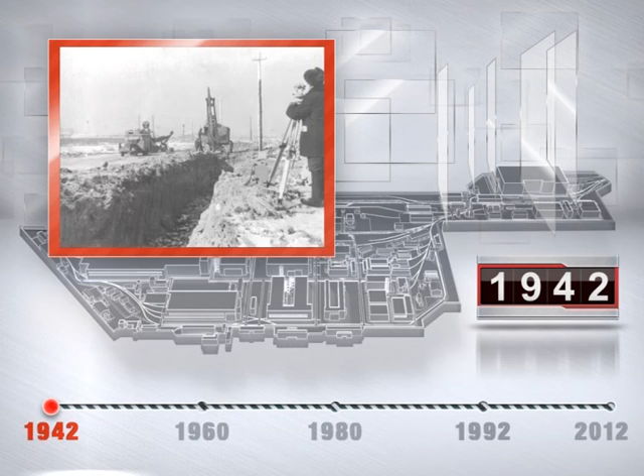Yuzhno-Uralsky Engineering Works was established in the early 40s of the last century in Orsk. In not simple wartime, manufacturing facilities were evacuated to town. One of such works marked the beginning of the plant. Over 70 years, ORMETO-YUMZ, included into mining and smelting holding company UMMC, is high-technology enterprise and ranks among leaders of Russian heavy engineering.

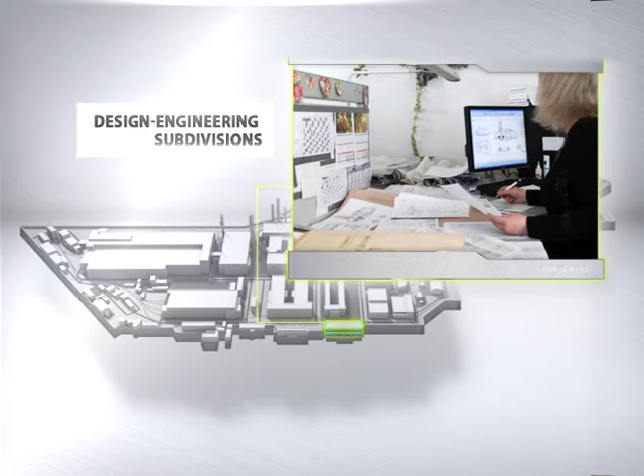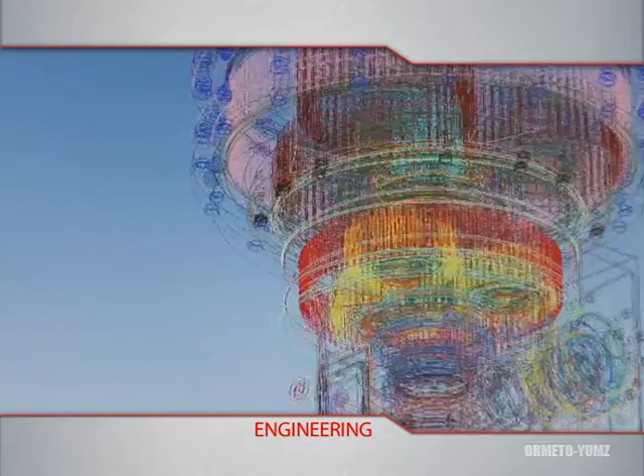Engineering and production potential of the enterprise makes possible to design, manufacture, deliver, and carry out contract supervision of equipment for enterprises of ferrous, non-ferrous, mining, and power engineering industries. 250 persons occupied in 6 design engineering departments design ORMETO-YUMZ hardware. Design engineering service specialists develop sintering machines, continuous casting machines, hoisting and handling equipment, crushers, mills, equipment for loose materials store yards.

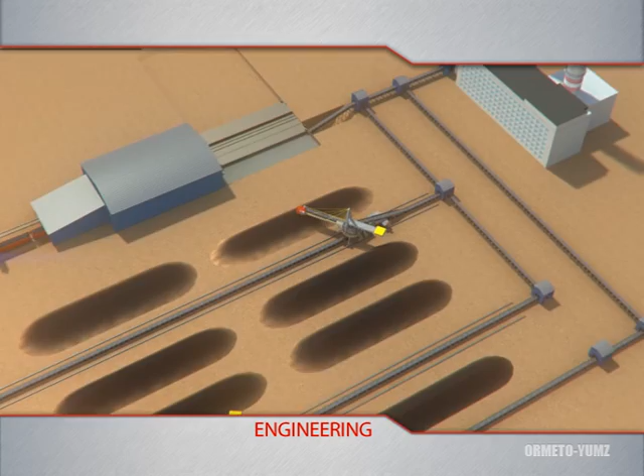ORMETO-YUMZ is a unique enterprise in Russia, which develops transfer equipment, car dumpers, stackers, reclaimers, and the one developer in the territory of post-Soviet area of blending equipment, which makes possible to obtain high constancy of raw material quality and properties.

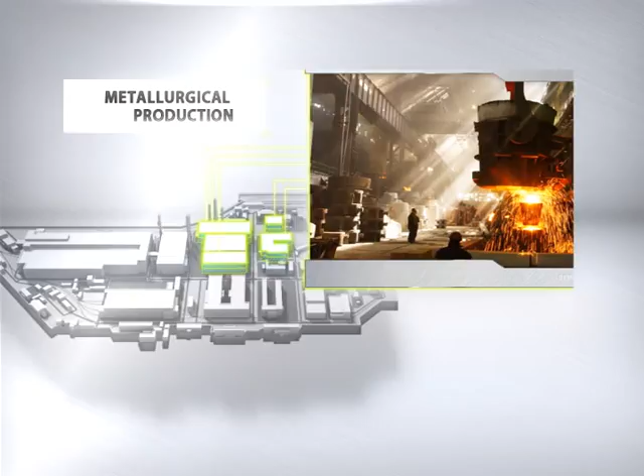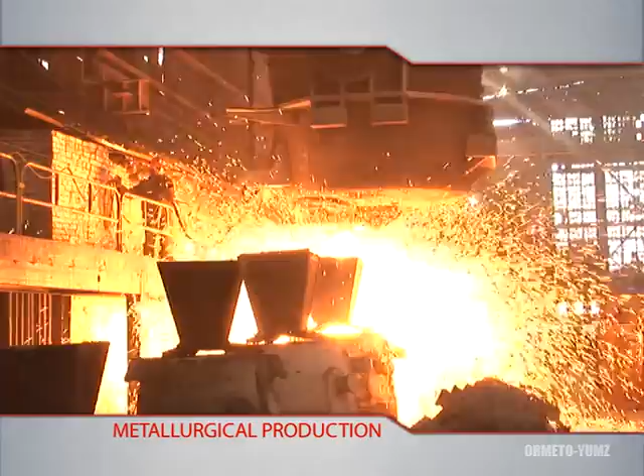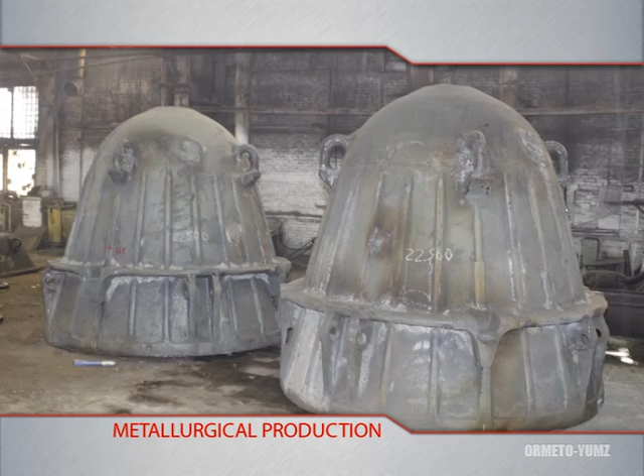The works possesses all necessary equipment for cyclical turnaround from metal smelting till the end product manufacturing. 50 and 12 tons capacity electric furnaces to melt carbon, alloy and heat-resistant steels, and ladle furnace of 70 tons capacity to secondary refining and vacuum chamber for metal degasification are installed in steel shop. Large capacity products from steel and iron up to 45 tons are manufactured in molded foundry at machine and hand molding bays. Installations of liquid self-hardening and cold hardening sands preparation.

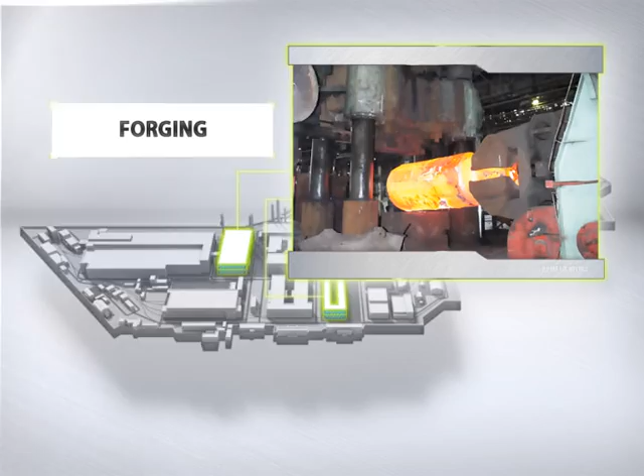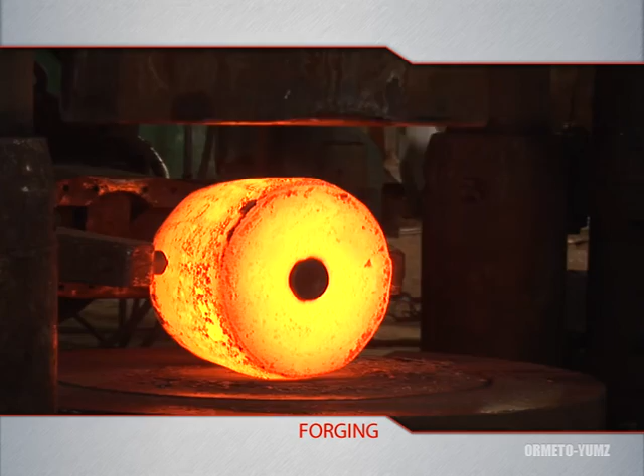Electric steel and iron foundry includes 2 electric furnaces, 3-ton and 1.5-ton capacity. Blast cupola, receiver tank capacity 5 tons, and non-ferrous casting area with electric furnace of 0.5 tons capacity to produce low-tonnage cast products from iron, steel, and non-ferrous metals. Forging manufacturing with weight up to 45 tons is carried out in forge and press shop on steam hydraulic presses with 800 tons and 3,000 tons force, and on hydraulic press with 6,000 tons force.

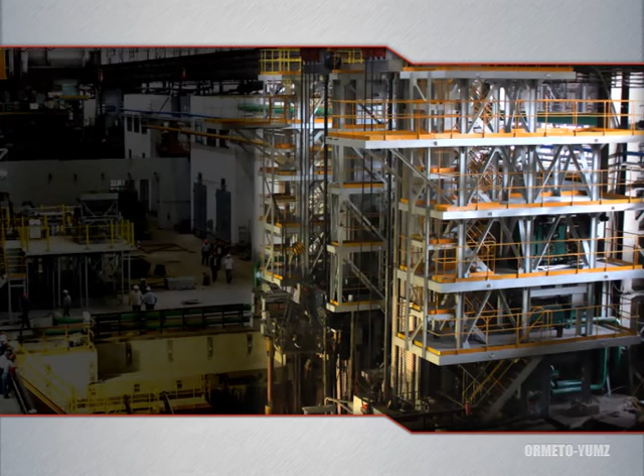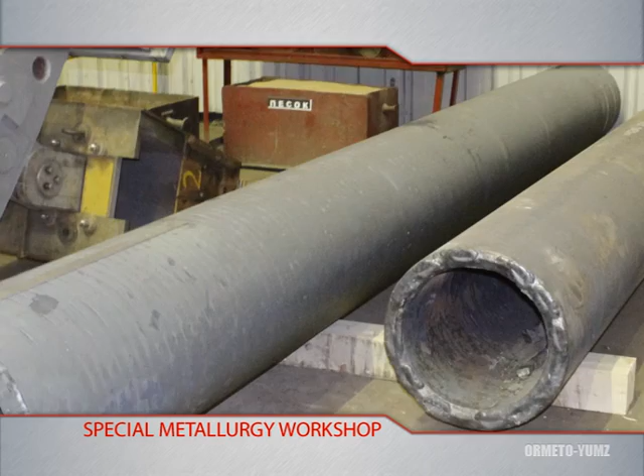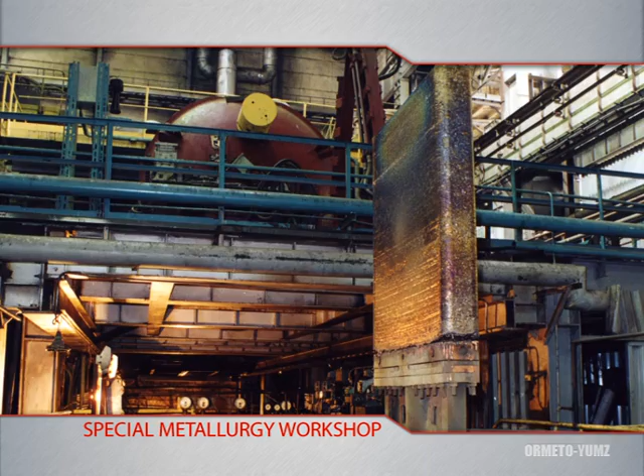Special metallurgy shop includes multi-purpose module complex of electroslag remelting and electron beam remelting. Electroslag remelting furnace built under assistance of Ministry of Industry and Trade of Russian Federation makes possible to produce high-quality solid and hollow ingots with diameter from 550 up to 1450 millimeters. The furnace is based on the high vacuum melting of metal or special property alloy using the energy of an electron beam. The furnace provides manufacturing of steel, titanium, copper slabs, and ingots of round and rectangular cross-section. Maximum weight of smelt ingots is up to 30 tons.

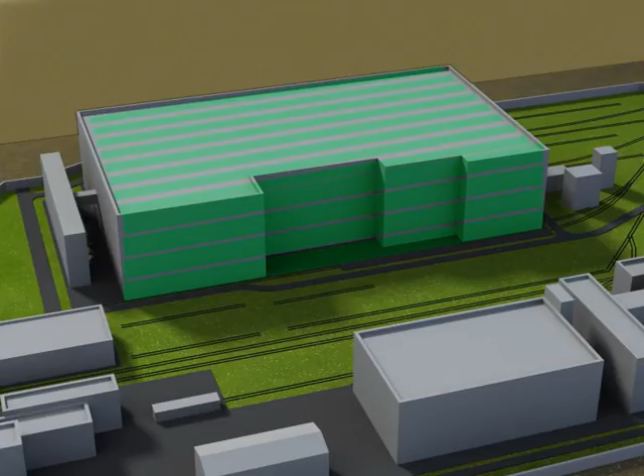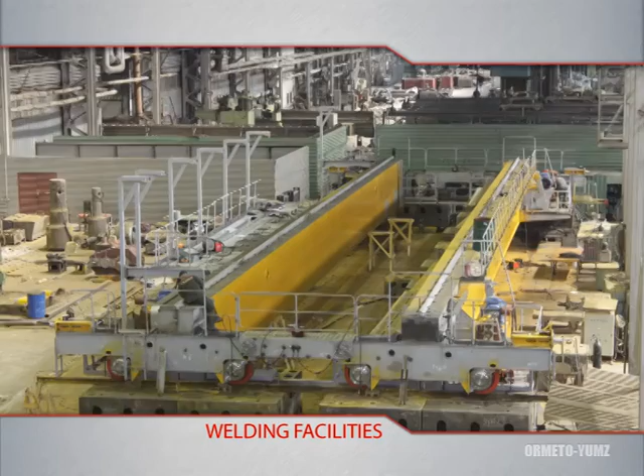ORMETO-YUMZ welding fabrication includes blank production shop, machining shop, and assembly and welding shop. The enterprise has the opportunity to produce heat-treated metalware made from rolled metal and multiple unit metalwares with weight up to 125 tons for metallurgical, hoisting and handling, oil and gas production equipment, building industry. Modern welding methods are used in welding metalware production.

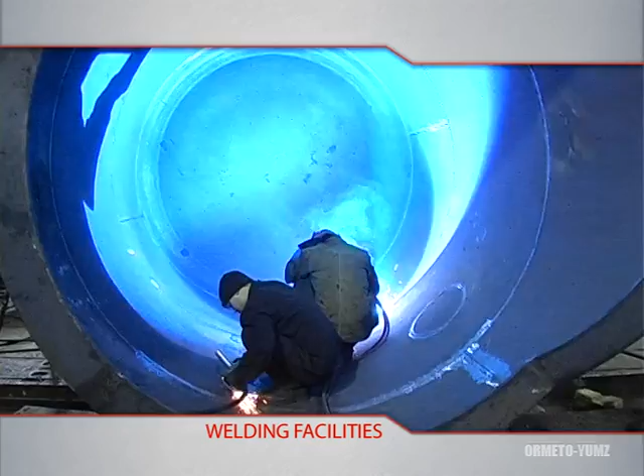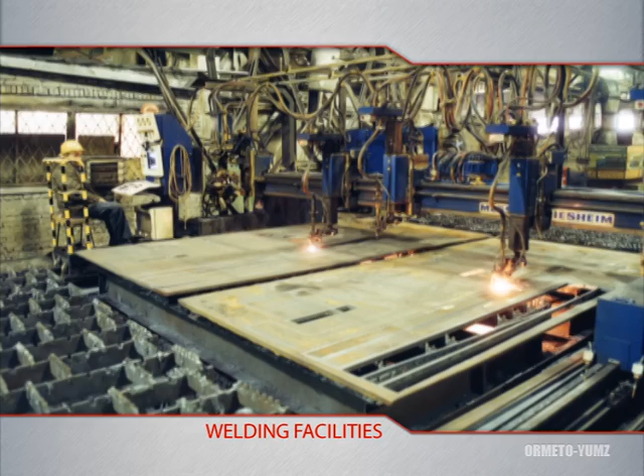Among them, machine welding in carbonic acid medium with wires of solid cross-section and powder materials. Machine welding under melt layer. Electroslag welding with combination of parts with thickness up to 800 millimeters in joint point. Powder materials plasma jet hard facing. Welding procedure specifications of hazardous technical devices are certified within System of National Agency of Non-Destructive Testing and Welding.

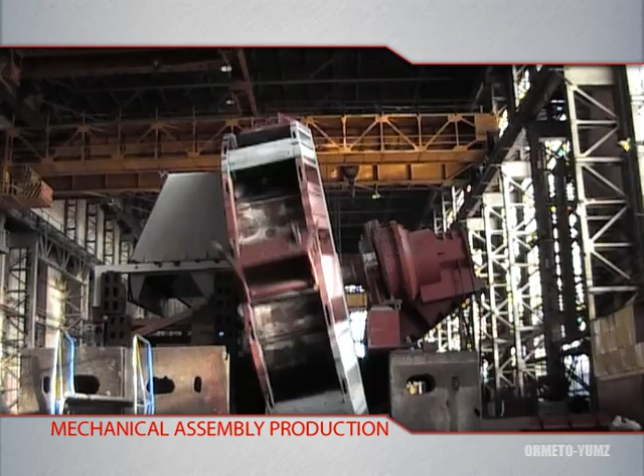At anniversary year, ORMETO-YUMZ buys and installs new hydraulic 4-roll sheet bending machine of Italian manufacture. Technical capabilities of sheet bending machine make possible to roll sheets having thickness up to 85 millimeters and width up to 3 meters. Heart of the enterprise is mechanical assembly production, including 4 shops which carry out machining of machines components made by the enterprise, and 3 assembly shops where produced machines are assembled, adjusted, painted, and packed.

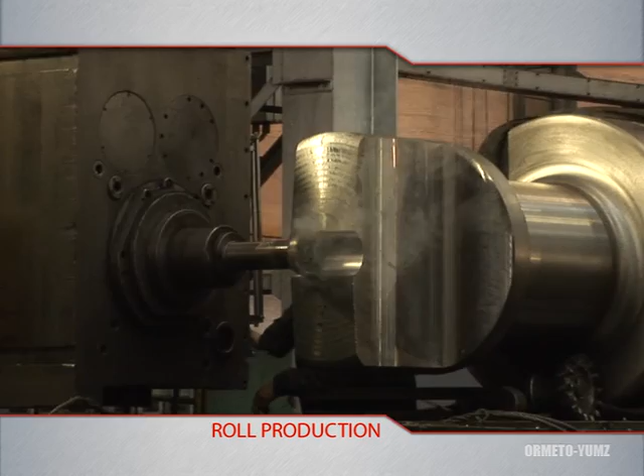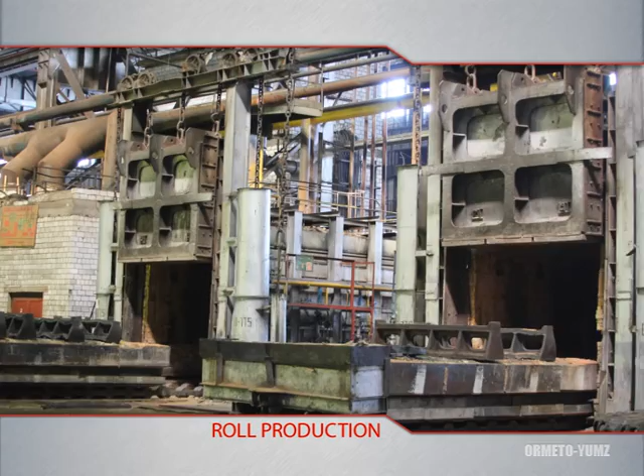The important part of ORMETO-YUMZ marketable products is forming rolls production. Consistent high quality of the rolls is provided by constant advancement of melting technology of roll steel, forging, heat treatment, and machining of the rolls. Adoption of electroslag remelting technology provides considerable quality improvement of made rolls. Heat treatment area of the shop is equipped with vertical furnaces, horizontal bogie-type furnaces, power current high-frequency hardening unit, and other equipment, which makes possible to carry out any kinds of heat treatment of machine parts, hot and cold rolled rolls.

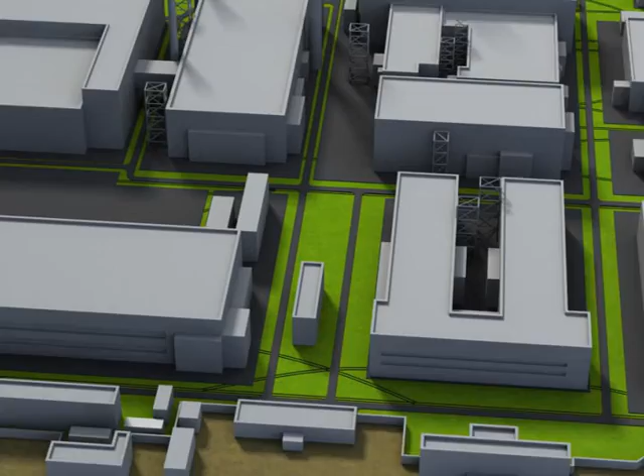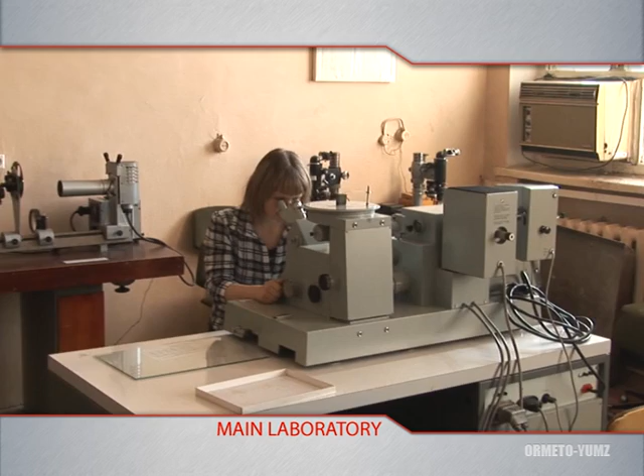All of the products under the trademark of ORMETO-YUMZ undergo strict quality control held at each stage of production. The main plant laboratory checks products' qualitative characteristics compliance. Quality Management System ISO 9001-2008 is valid in the enterprise. Quality service provides full adherence to all standards.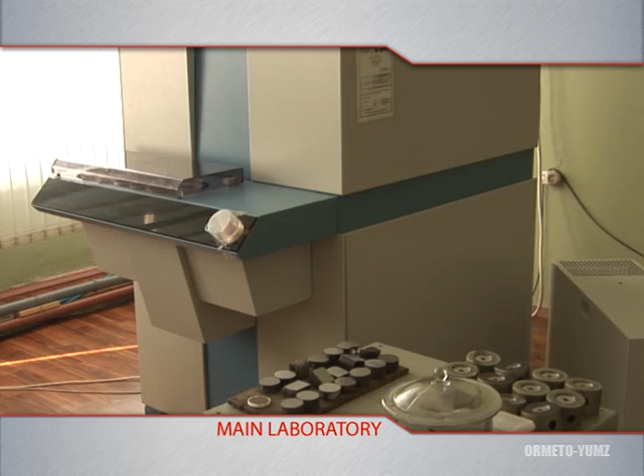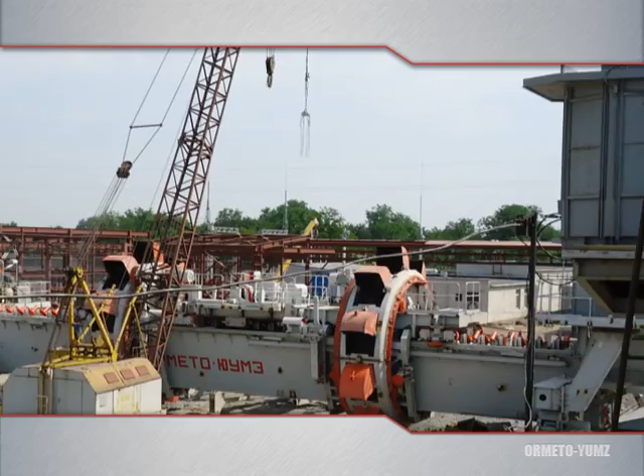Due to this, the product's quality was confirmed with competent certificates and licenses, such as ISO 9001-2008 certificate, Det Norsk Veritas, Lloyd certificate for production of steel forgings, license on production of nuclear facilities and storages for nuclear materials. Service Engineering Center provides contract supervision of equipment's consumer plants and its further technical audit.

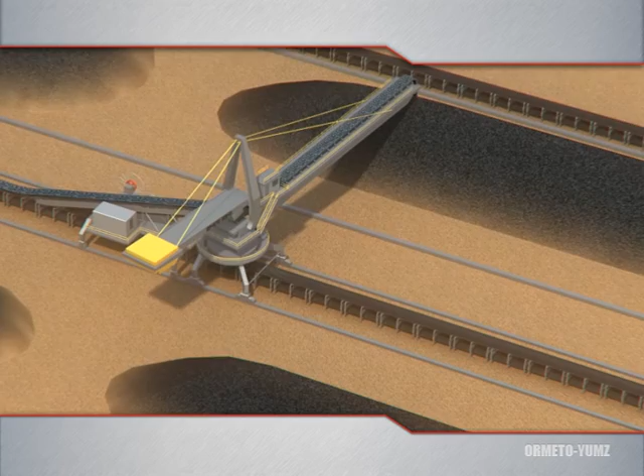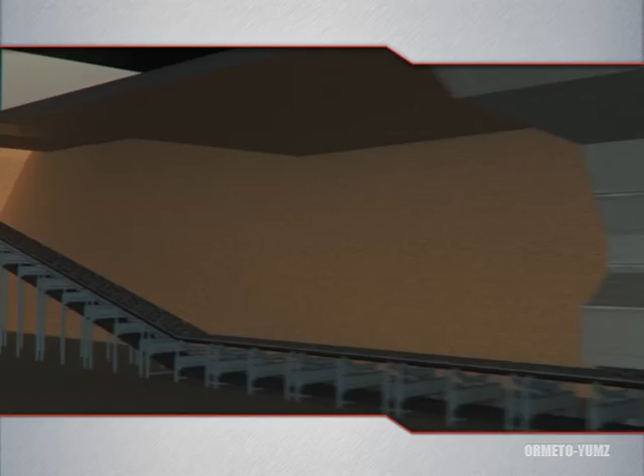ORMETO-YUMZ production includes more than 100 sorts of equipment. Facilities for processing and transportation of piled raw materials, car dumpers, stackers, reclaimers, blending machines, and belt conveyors have a special place among our products. This equipment is used in fuel preparation complexes for power plants and in port transshipment complexes, as well as in discharge blending complexes of raw materials preparation shops in metallurgy.

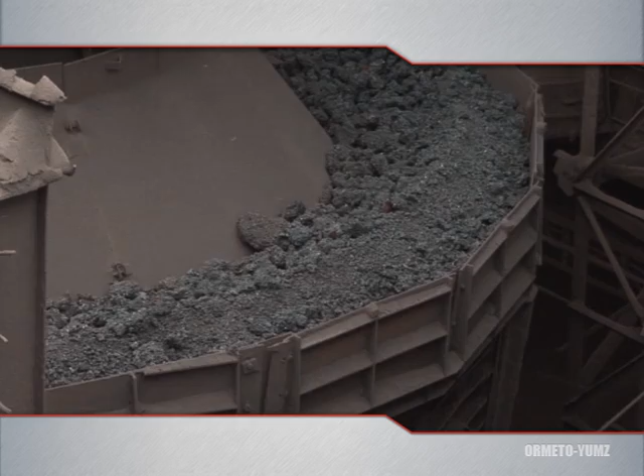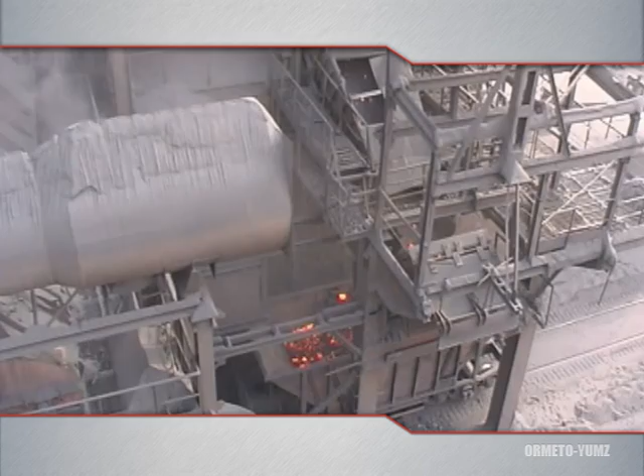Sintering equipment under the trademark of ORMETO-YUMZ, such as sintering machines, coolers, and support equipment, is operated in such large enterprises as Zaporizhstal, Chelyabinsk Metallurgical Plant, Ural Steel, and in different countries: Turkey, Pakistan, Egypt, Bulgaria, Cuba, China, Iran, and India. The biggest sintering machine was installed in Visakhapatnam Steel Plant in India. Its sintering area is 408 square meters.

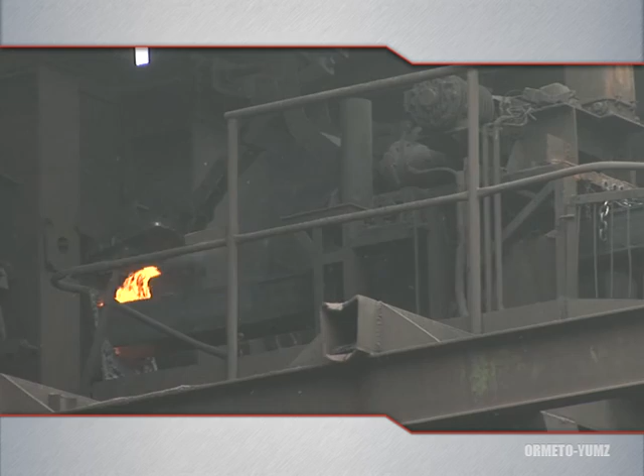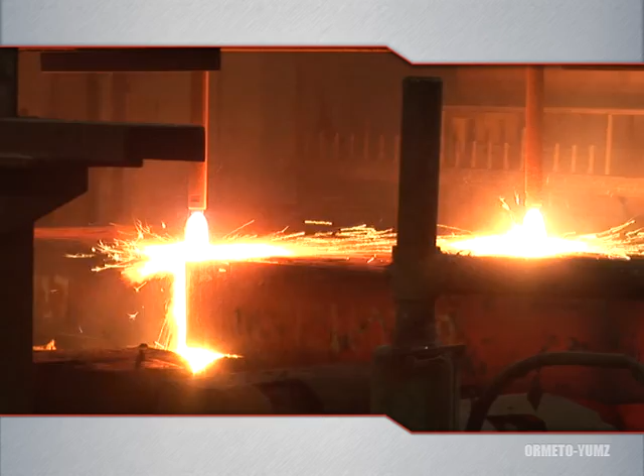Our enterprise manufactures coke pushers, mud guns, slag carriages, ladle cars, skip winches, top charging gears for coke, blast furnace, and steel industries. For ferrous metallurgy, ORMETO-YUMZ manufactures billet and bloom continuous casting machines, turrets, mechanisms and assemblies for rolling mills.

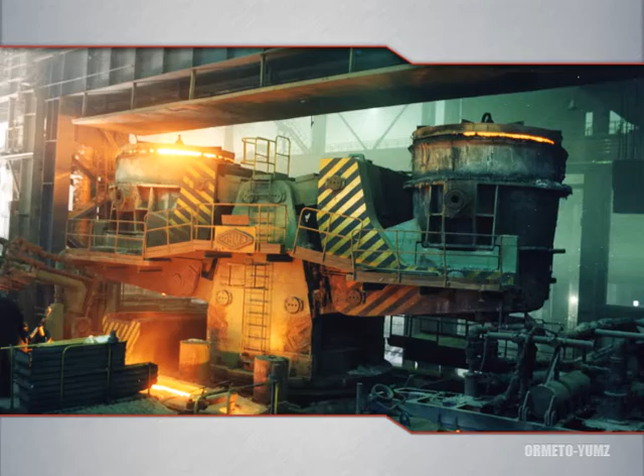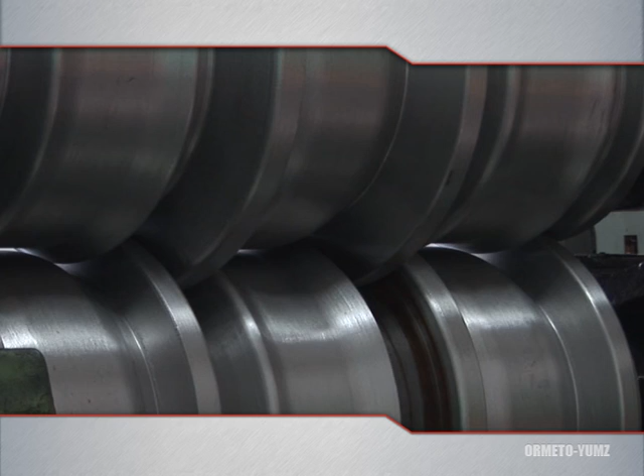ORMETO-YUMZ took part in engineering and reconstruction of continuous casting machines in metallurgical plants such as Ural Steel, Severstal, Belarusian Steelworks, Oskol Electrometallurgical Plant, as well as in India and many others. ORMETO-YUMZ is one of the leading Russian manufacturers of steel and iron mill rolls. During the last 30 years, the enterprise manufactured over 420,000 tons of mill rolls for consumers from the countries of the CIS, Europe, and Asia.

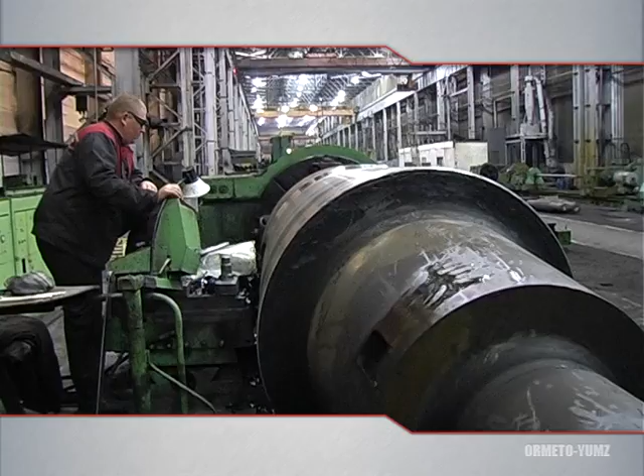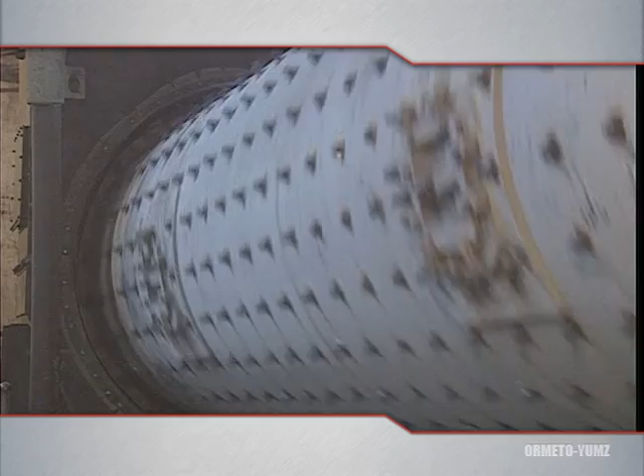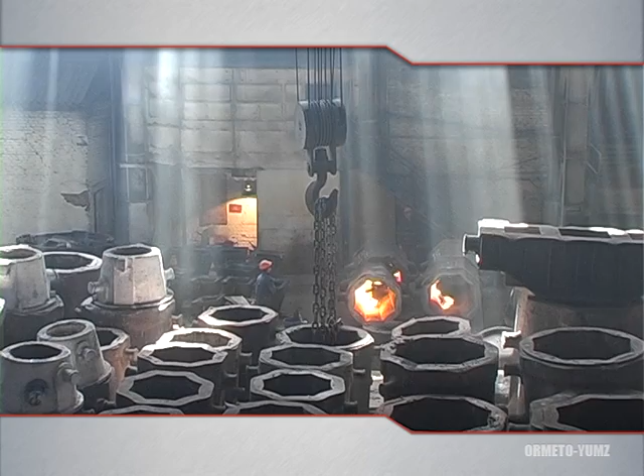Except metallurgical enterprises, our main customers are enterprises of cement and mining industries, and non-ferrous metallurgy. ORMETO-YUMZ manufactures crushers of coarse breaking, secondary crushing, fine crushing, and mills for dry milling and wet milling. Today, ORMETO-YUMZ holds the leading rank on the materials handling equipment market in Russia.

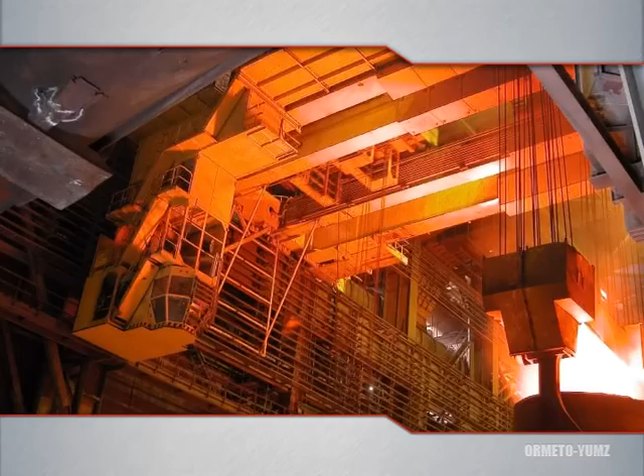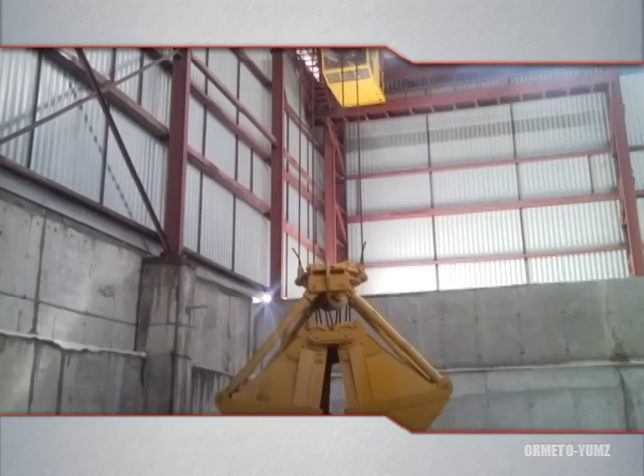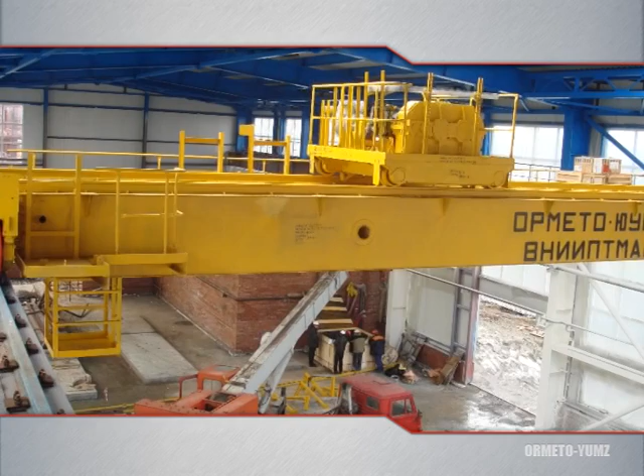The plant manufactures overhead cranes for metallurgical enterprises, enterprises of the fuel energy complex, including heat stations, hydro plants, and nuclear power plants. Product range includes overhead ladle cranes with carrying capacity of up to 520 tons, picking cranes, scoop cranes, charging cranes with carrying capacity up to 200 tons, claw cranes, overhead dogging cranes, magnetic grab cranes, cranes for general transport manufacturing purpose in nuclear power stations, and general purpose cranes.

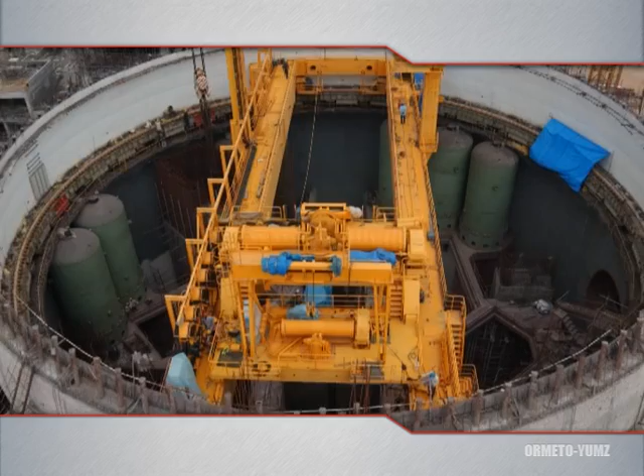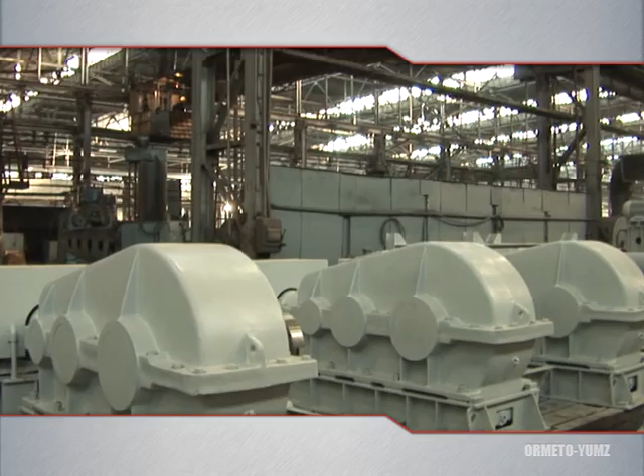The first EOT crane of 50 tons capacity was manufactured and dispatched for JSC Ural Steel, Novotroitsk, in 2008. Cooperation of ORMETO-YUMZ with enterprises of the nuclear industry began in 2009 with a supply of a crane for Balakovo nuclear power plant. ORMETO-YUMZ returned to the market of gas and oil producing industry equipment. Mud pumps, winches, and other equipment were manufactured and are operated in the enterprises of consumers in Russia and CIS.

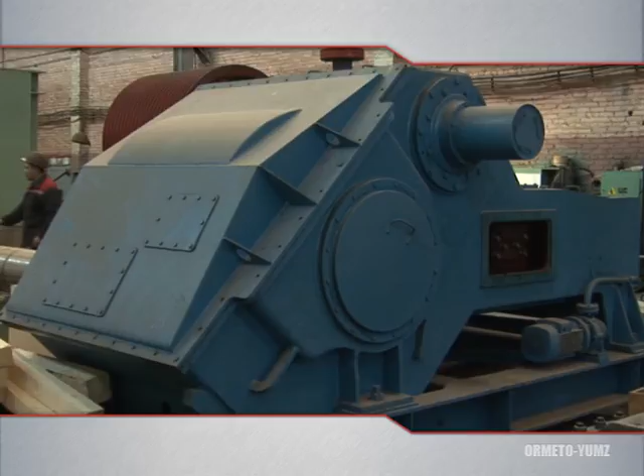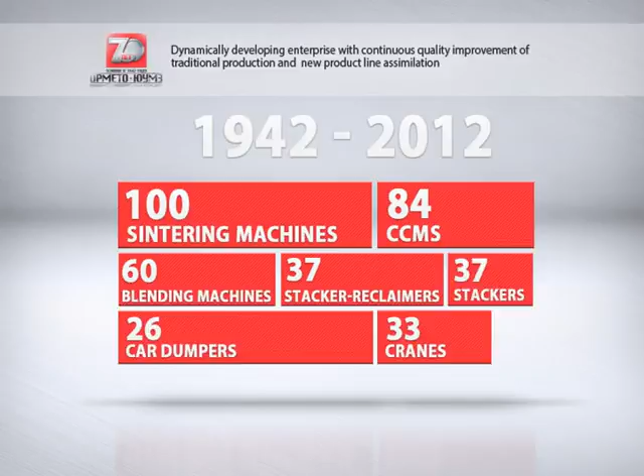The plant takes active part in leading industrial groups, Russian Engineering Union and Metallurgmash. The quality of our equipment was highly appreciated in the plants of ferrous and non-ferrous metallurgy, in enterprises of the metal mining industry, and of the fuel and power complex of Russia, CIS countries, Asia, North Africa, Western and Eastern Europe. It's more than 30 countries. ORMETO-YUMZ, an individual approach towards heavy engineering.